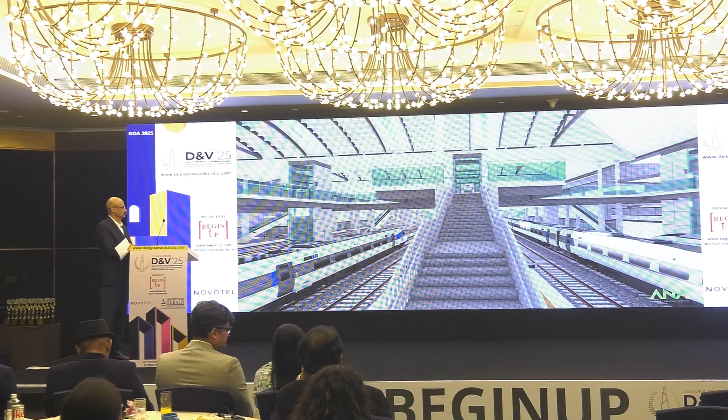All right, thank you, thank you. You can stop.

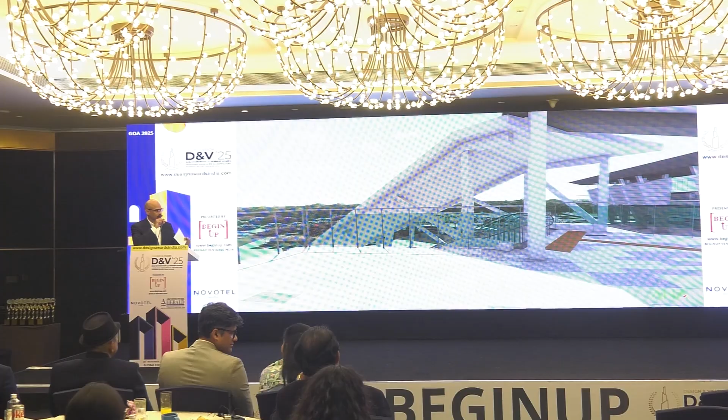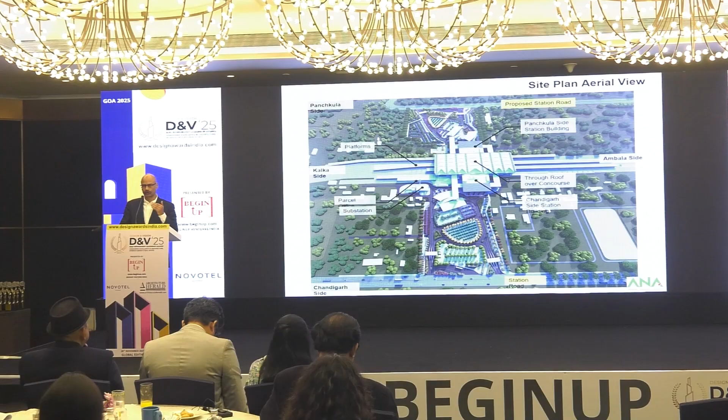So you've seen the walkthrough of the station. It's a pretty straightforward design. There are transport interchanges between buses, cars, pedestrians going on to trains and various functions. I don't need to get into that, you all understand it. I will also purposely not get into the architectural language. What I will get into is the technology that went into the design and eventually how it was used to construct. It's a very important station on several accounts.

Number one, this is one of the first few that was commissioned for actual construction. Just to give you numbers, India has close to 8,800 stations, and currently only 54 are being renovated. There is a plan to renovate all of them, but there is massive, if I may be so bold, unlearning that needs to happen within the system to actually create something which belongs to the future and not replicate what has been happening in the past.

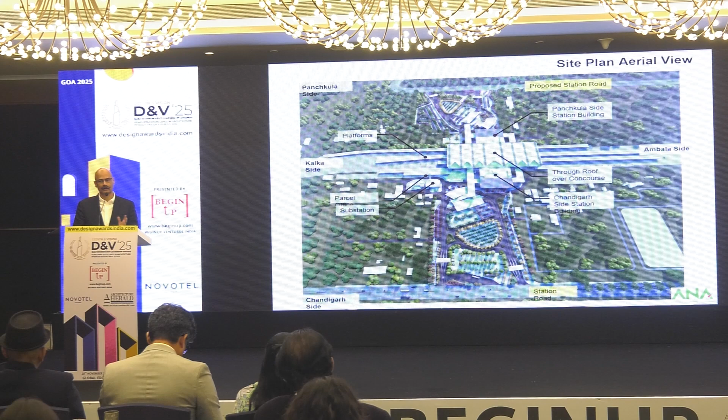There are some very good reasons why the railways work the way it does. The number of passengers we move is the largest in the world, nobody else moves as many passengers, there are just so many of us. This is a station that straddles two cities, Panchkula and Chandigarh. It also ended up being an urban design project where there is a pedestrian connection. Like I said, I don't want to get into the architecture of it.

This is finally the plan that has come about. This plan, the way you see it, and you're from the profession, so you understand what these plans mean. When you look at it from the standpoint of materiality, this has about roughly 2 million elements that need to be put together to make this building function the way we want it to. Those 2 million elements start with what kind of excavation and grading is going to happen. One of the challenges we took upon ourselves was that we will not throw out any construction debris, and we will not get soil from outside. Whatever is there is on the site, it's a completely net zero throughout kind of site.

No water is being thrown, no soil is being thrown, no debris is being thrown, etc.

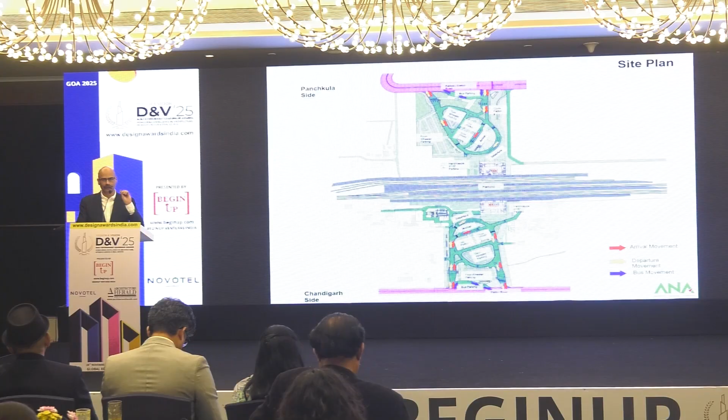The challenge here was that we are on a strict timeline. It's an aggressive government, we are a hungry nation, we want to get everything done yesterday. To start with, the timeline given was just about 30 months.

It's gone into about 36 months, but should be completed now. Therefore, the challenge as a design team was that we are going to construct while we design. The design was not completed, the drawings were not completed, and we had to go into construction.

So I'll skip to the BIM stuff.

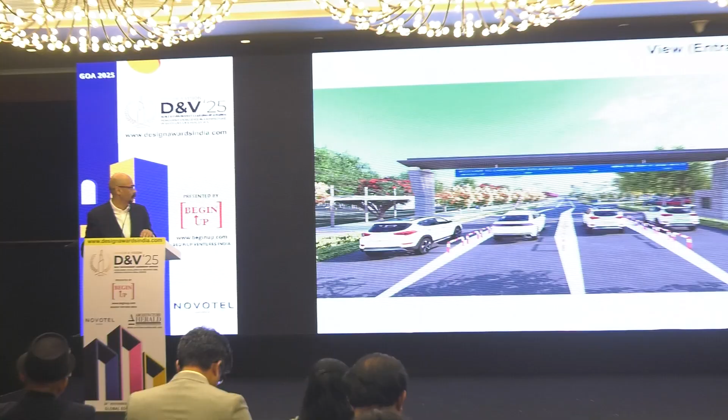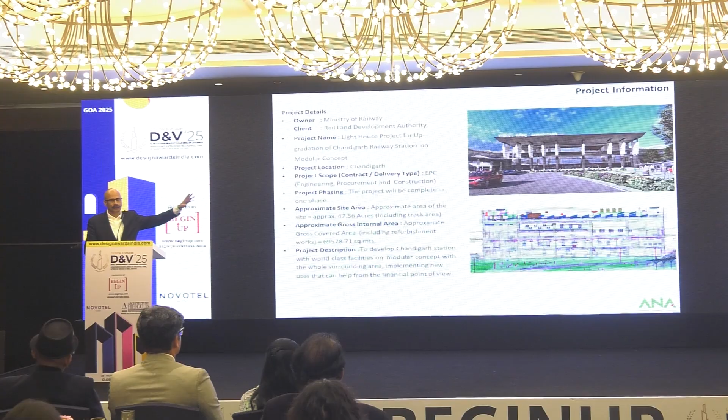Apologies, the location etc. I've already told you. So the pretty picture, that I consider it pretty, not everybody will like it, but that's all right.

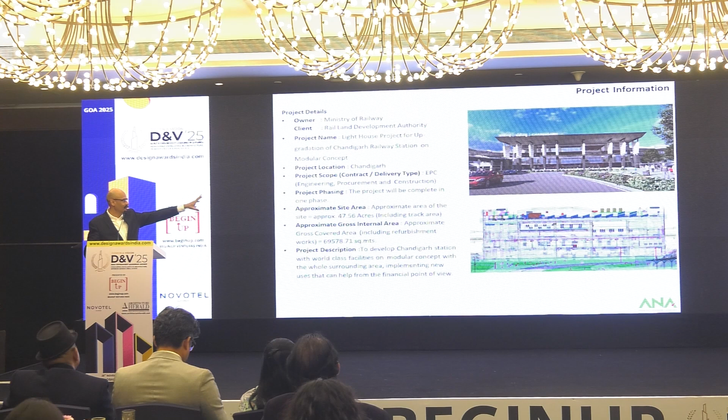The pretty picture that you see on top has a skeleton that looks like what you see at the bottom. That set of elements, basically Corbusier's fins and his roof of the High Court, is made up of about 2,000 elements.

This process needed to happen while the construction was going on. So we didn't have a chance to revise any of the drawings. There was no chance to look at an idea that was better that came two months late.

Whatever ideas were good ideas that came in on the first week were the ones that needed to be implemented. And so therefore it was a lot of sleepless nights.

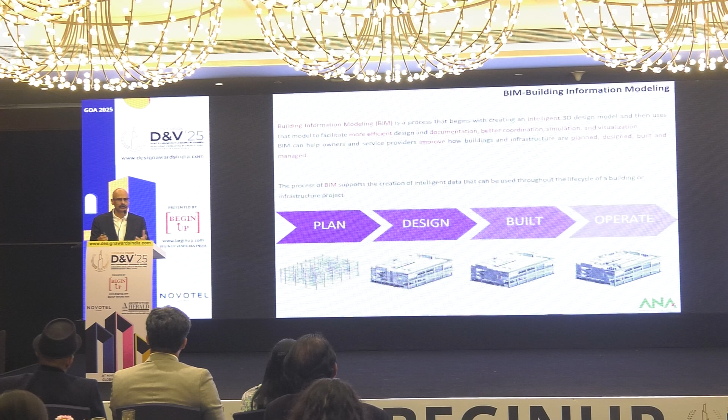Ajay mentioned living architecture, all of you do that. So I'm not seeking any sympathy, maybe some empathy somewhere.

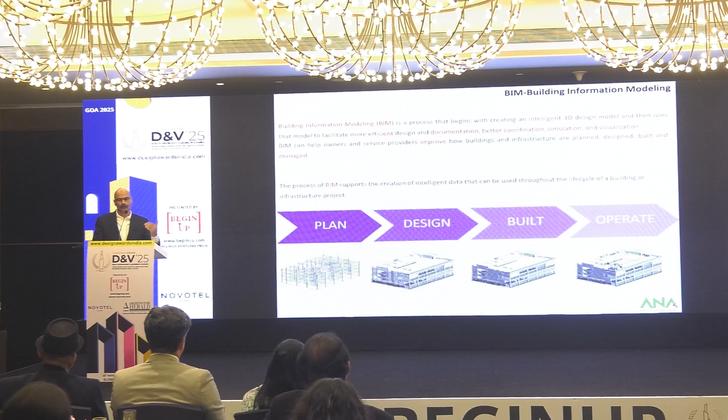The growth that you see of the skeleton to the skin and to the final building was happening in continuity. This is a screen grab of an actual model from the project of one of the station side buildings.

Integration of structure, the mechanical properties of it, all of the services, solar energy that is going to be produced.

By the way, the final product is going to eventually become an operating net zero energy model.

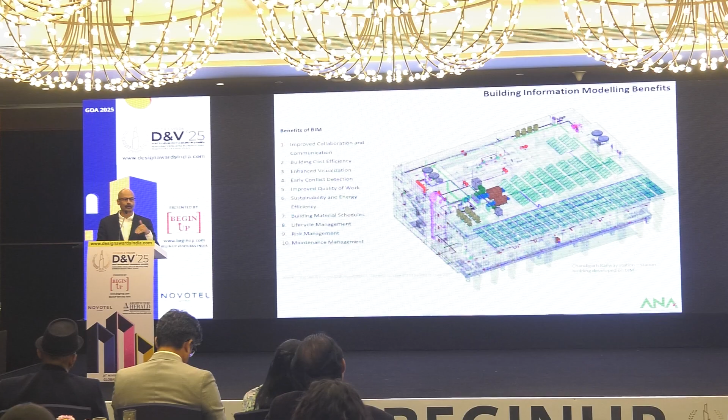We are not going to be net zero from an environmental perspective of being able to give back energy that has been taken into building the station, but it will be an operational net zero project where the energy being produced on the site is equivalent or more to the energy being used to run the station.

So these elements became the project. You're familiar with BIM, it's a philosophy that's now close to about 16, 17 years old.

We adopted it in 2015, but the fun part of this technology, or the opportunity in this technology, is that it is allowing us to look at having a leap into the next step that we do.

We have no doubt about the capacity and capability of our design teams. Shell just so eloquently put it, I can't really add any words to what she's already spoken about.

It's literally the death knell for mediocrity, and the guys who are at the top of the game are the ones who are going to remain designers. So that can never be taken away.

However, the fact of the matter is, if you drive around any of the cities, including the one we are in today, construction sites and infrastructure development sites are the biggest bottleneck to good quality in the city while they are being built.

It's the worst thing to happen to a city, to build a flyover or a bridge, and then everybody just braces and says, 'ab 3 saal ke liye to gaye, ab yahan se to nahi ja sakte' - there's going to be a traffic jam every day, etc. There's going to be dust.

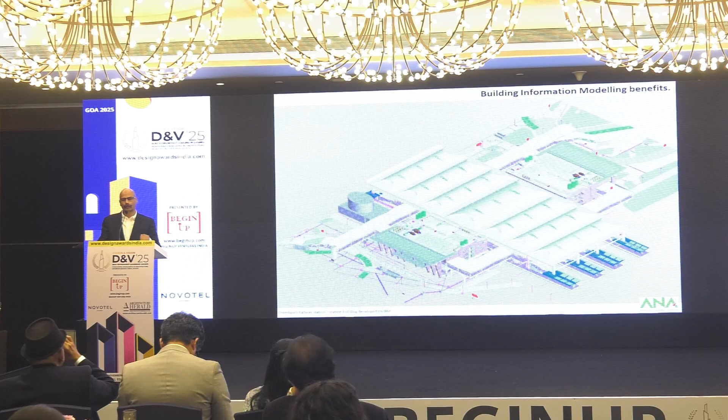So how are we going to leapfrog from here into industrializing construction systems, where components of construction, to the largest extent possible, can be made somewhere, transported to site, and they actually fit?

That's again a second big part of the construction technology challenge that we have, and unfortunately it's unique to this country. I think somehow along the way of being speedy, being needy and hungry, we've lost the ability to do things that fit.

Walk out, try walking on the pavement, and I think you will know exactly what I'm saying.

But we said, okay, we're going to look at it as modularization of pretty much everything that we could. So some of the models that you will see, all of the underground services here in the station are modular. They're produced in a factory.

So I think almost no brick manholes, almost no pipe connections that went underground, almost no the site supervisor deciding what he's going to do. All the covers are the same. So this is really something that is an attempt.

I'm not claiming that we reached the sort of zenith of what we started out to do. We started out with big ideas. We've managed to deliver some of them.

So the structures are modular. Most of the facade systems are modular. The roof that you see, just to again give you numbers, is almost about 2.5 acres in size.

That central roof that you see is 2.5 acres in size, is all modular, completely prefabricated, and only installed on site.

And the station continued to run while the construction was going on. Train services were not stopped even for a single day. And there are close to 27,000 people that come here every day.

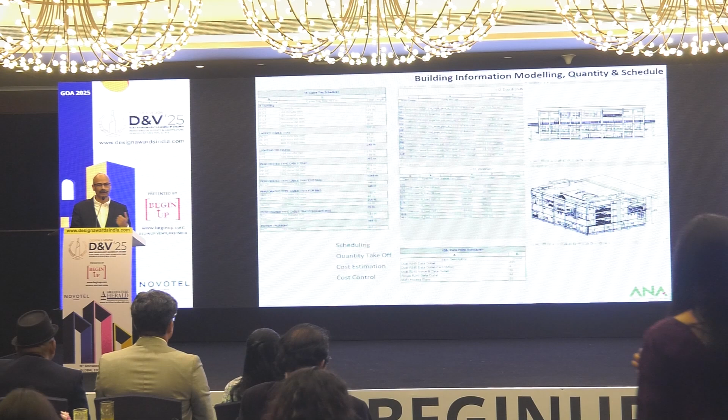So Ajay again eloquently spoke about financial management and sustainability - this is how it's actually practically implemented. These are screen grabs from the actual project drawings that have been implemented. You can't really read the schedules, but for those of you who know, all of the material schedules come out of BIM, so you know exactly what is being purchased on the site.

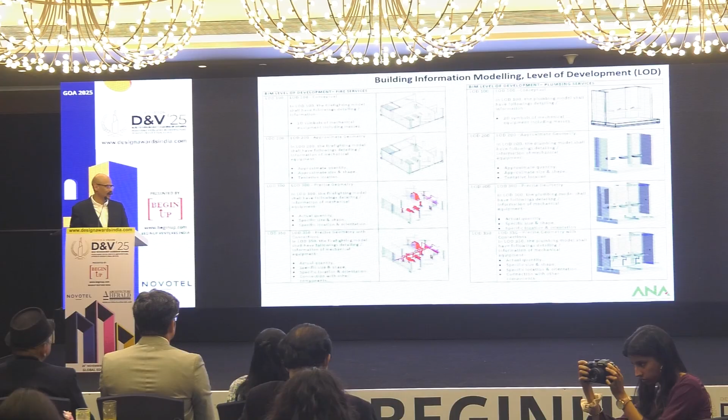The big misses on this project, the ones I feel sad about - I'm just quickly cycling through the slides. The big miss is we were not able to adequately train downstream teams on the use of BIM. That's been my big miss on this project, and I hope more people will take it up in the country, and we can do that. That is the next step.

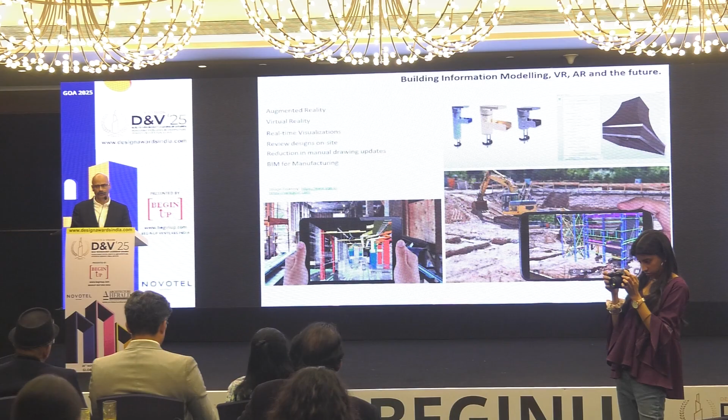It's being used in our Mumbai project, where there is BIM integration on visual field devices. So you actually do not need to carry big bundles of drawings with 100 or 200 drawings in them. It's on the cloud - your device talks to the cloud, also visually looks at the site, and you know what needs to get done. It's in a nascent stage, a technology that's been used in some countries, and is being used in our country now through the efforts of all the brilliant people that I work with on this.

So this is really the future of BIM. I think it's something that ought to be looked at very seriously, because if we continue to do things the way we do, all of you as practitioners in this field have noticed that what you think in a studio, discuss in a conference room, degenerates by 20-30% when it goes to the site.

I will leave you today with another run of the same video that you saw, but this one is a BIM grab, so you can sort of make a view yourself of what the pretty picture was and the skin, bone, and muscle that goes on behind it.

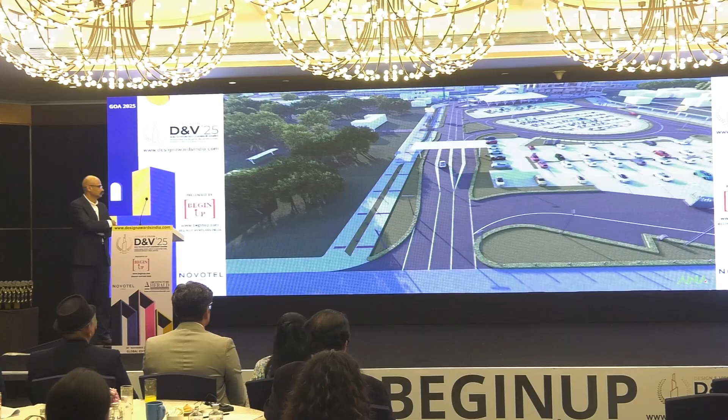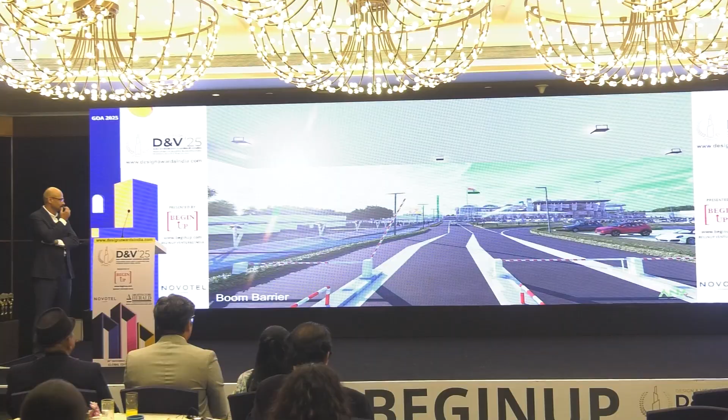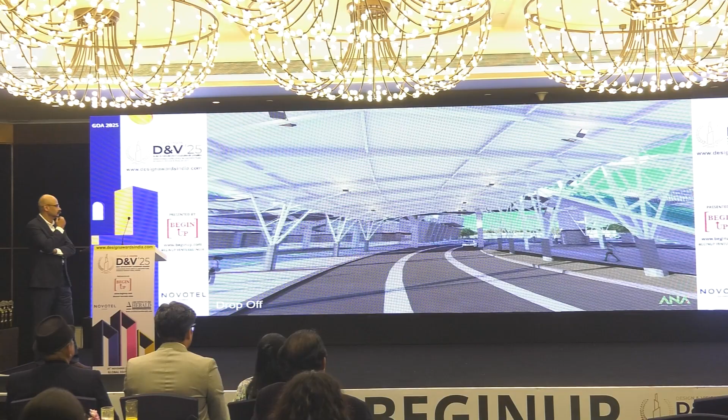Trees and flowers have gone away in this one. This is pre-plantation. That's 20 million elements coming together.

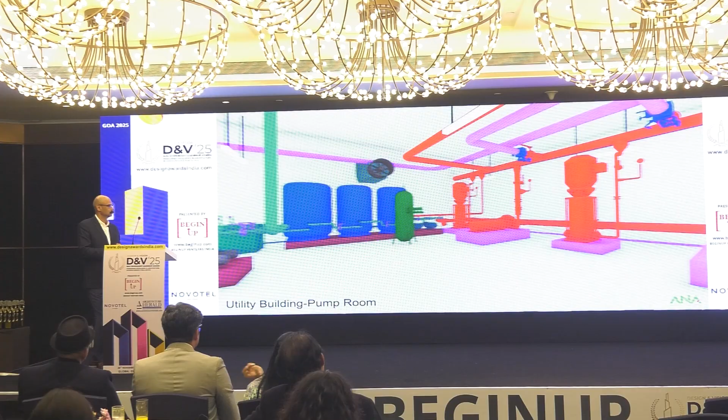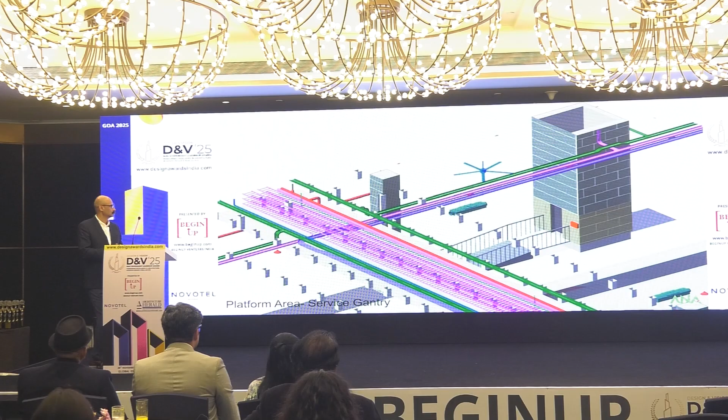You can stop it now.